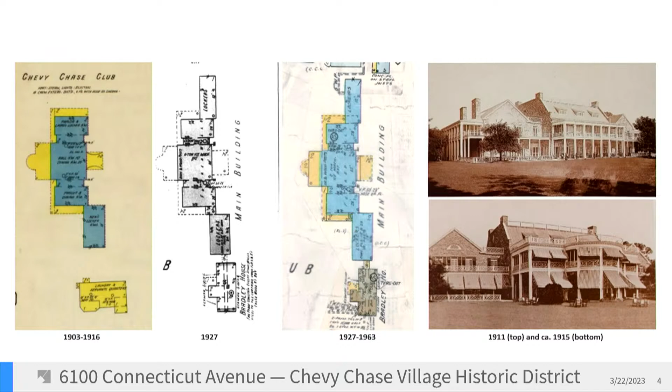The project team included this very helpful graphic that shows the different phases of development. You have the enclosure of that porch in the rear in 1939 and replacement of some of the windows in 1969 and 2002. You have this 1958 addition that doesn't pop up on the Sanborn map for some reason, but it's in the Chevy Chase Club's records.

And also, probably most prominently, you have the demolition of what was that Northern Woman's Locker here in 1969 for this large addition.

The proposal includes fenestration alterations, alterations to an existing terrace and patio, construction of a new terrace and deck, hardscape and pathway alterations, installation of cable railings, rooftop mechanical equipment, removal of 2 trees, and lighting alterations and replacements.

I'm going to walk through the various stages, starting with the fenestration alterations. Overall, staff finds that all the proposed elements are compatible with the massing, scale, design, and materials of the historic resource and district, and should be approved as a matter of course.

Starting on the southern end of the building, due to the location on the rear of the building or areas not visible from Connecticut Avenue, we have this corridor and the replacement of a window with a door. Just to orient you, here is the corridor that connects the men's locker room, which was part of that original 1911 building, to the Bradley House, a 1926 addition. The historic district boundary actually cuts right through the center of that corridor.

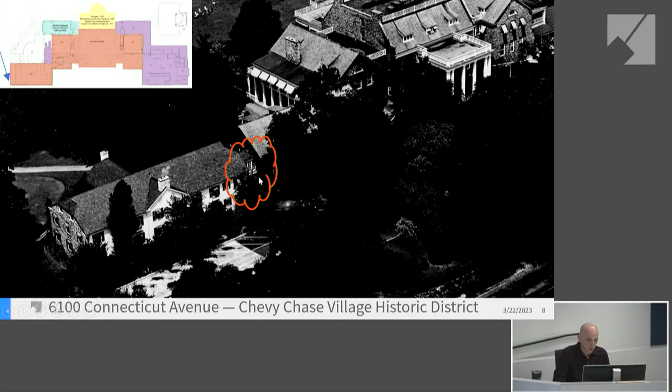Here it is in the present day, looking at it from the rear of the property. You can see the replacement of this window. They're going to cut the stone walls down to install a 6-panel wood door with a 6-light transom above it. This door also matches a door on the opposite side of the corridor that accesses the Bradley House.

Staff finds this to be compatible with the design, and again, it should be reviewed with very lenient scrutiny as it's on a non-visible location of the clubhouse.

Moving further along, this is the south elevation of the 1969 vestibule. The proposal is to replace these 2 non-historic 12-light wood windows with a double-leaf 10-light wood door. The design actually better recalls some of the fenestration patterns formerly seen at this building in historic photographs.

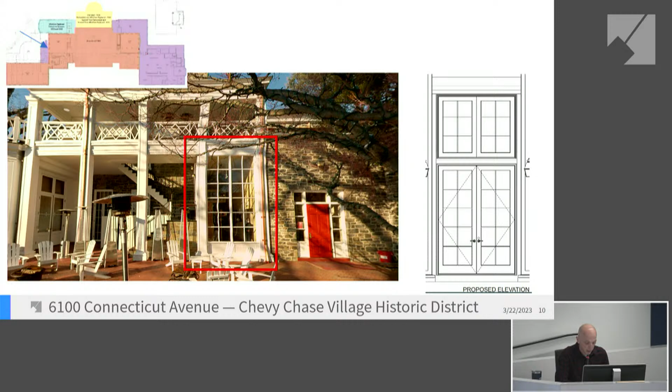Next, we have the replacement of these 2 double-leaf wood doors with a single-leaf door and a 3-light transom. This is on the south elevation in the original south gable wing that accesses the tap and card rooms.

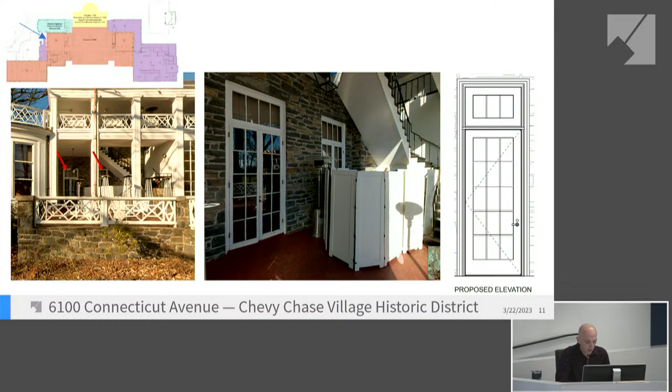On the west and southern elevations of the 1958 addition, the proposal calls for the replacement of the fixed 2-light windows in kind, and the replacement of the triple hung windows shown with the arrows on the screen with 2-light fixed windows that will match the design of the existing window.

Here are those same triple hung windows from that 1958 addition shown on the other western side of that elevation. There's 4 of them on this side. I think the applicant team may talk about, on site, how this bar is actually going to be slightly lowered, I believe, but it wasn't evident from the application, and they may have more comments on that when they speak.

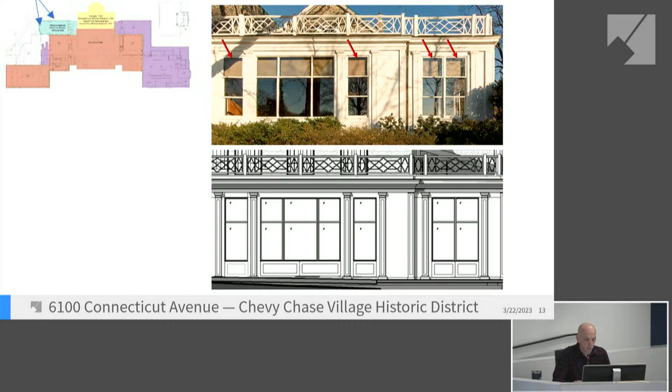Here we have the nearly in-kind replacement of a pair of double-leaf doors on that 1958 addition. The door on the right would now be permanently fixed, but would be a false door to recall what is presently there.

Here on the north elevation of the 1969 terrace room, we have the restoration of an opening to its original appearance. The doors would be removed and replaced with fixed light windows that match the existing 2.

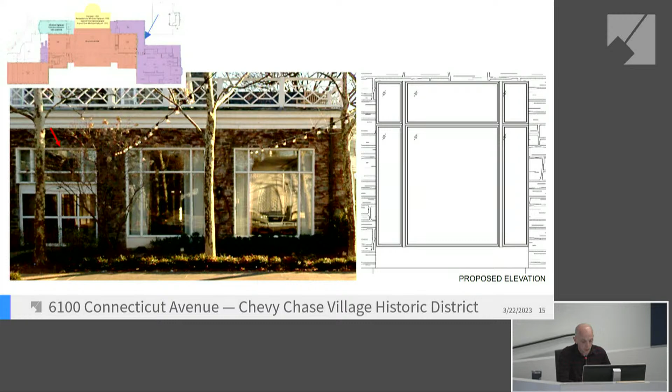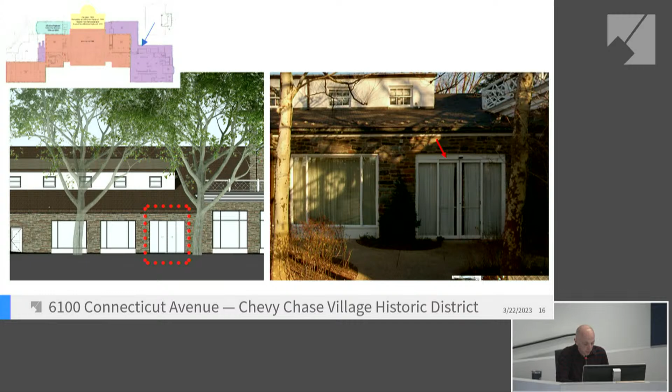Here, this is the 1969 pool and canteen wing. The submission didn't include any detailed sheets on this proposal, but it does note the in-kind replacement of the automatic doors.

Here for the last fenestration change, this is the north elevation of the 1969 pool and canteen wing: the replacement of the fixed light windows and double leaf door in the canted bay. Something I missed on the staff report is that these windows on the side are actually doors, and they would be replaced with 4 light windows.

Again, this is on a non-historic section of the building, and also not visible from the public right-of-way, and should be approved as a matter of course, similar to the other fenestration alterations.

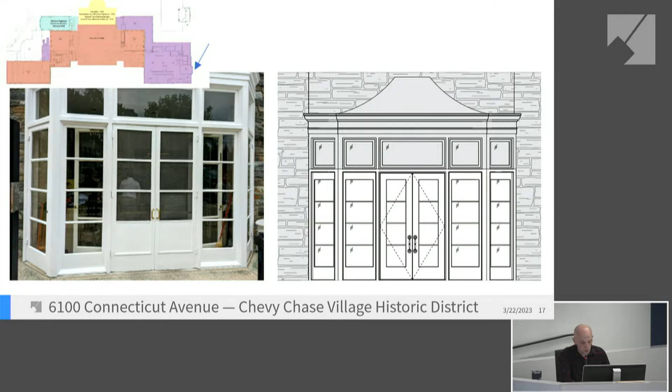Moving forward to the roof alterations, for the northern and southern terraces on the rear elevation, where the blue arrows point, they have planned to re-roof and install wood decking, which would not be evident from the public right-of-way or really from any part of the property.

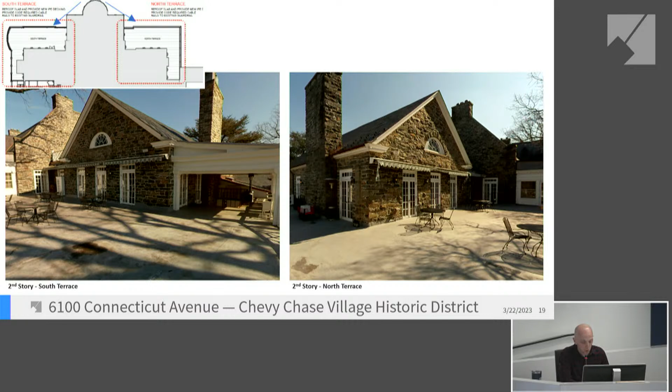As part of this project, they're proposing to install cable railing behind the existing wood Chippendale railings as required by code. As you can see in the example photographs, this is really a transparent solution in lieu of alterations to these character-defining railings, and staff is supportive of this alteration to this part of the building.

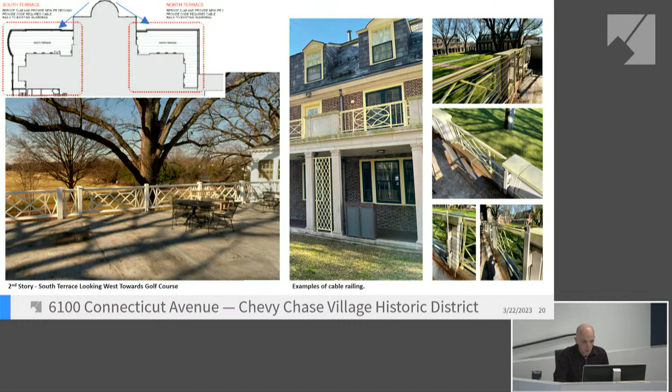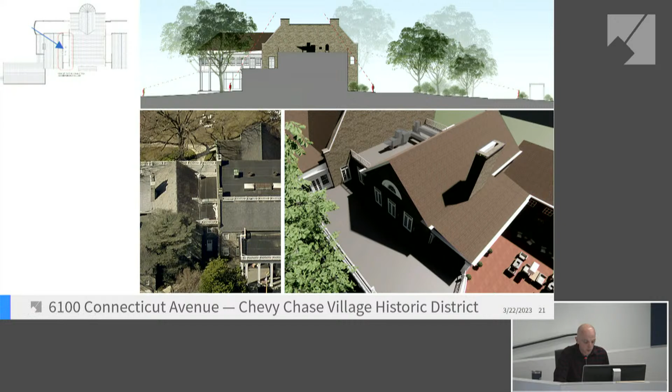Moving forward to probably the most significant part of the project: the terrace, deck, and landscape alterations. This is the existing condition now. As a refresher, the historic district boundary ends at the corridor connecting the Dudley house to the men's locker room. There's an existing brick patio here installed in 1969. There was probably a patio there prior to that, but construction photographs show it was all torn up at that period. And you have this 1958 wing here.

Also of note are the 2 tree removals you can see on this plan: a 12-inch black gum and a 10-inch sweet gum tree.

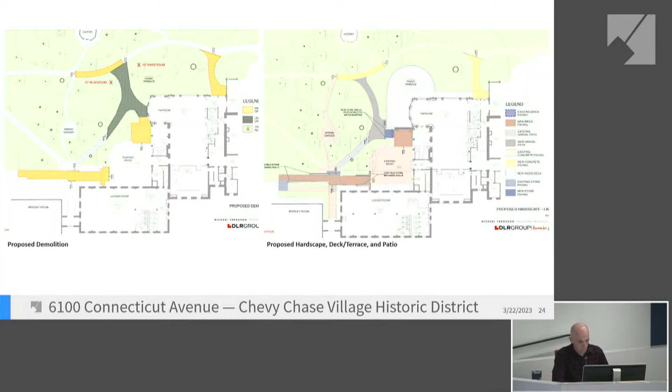As part of this, moving forward, the applicant should address how they'll construct the deck in consideration of any nearby significant trees in relation to the footings and other construction methods they may address in their presentation tonight.

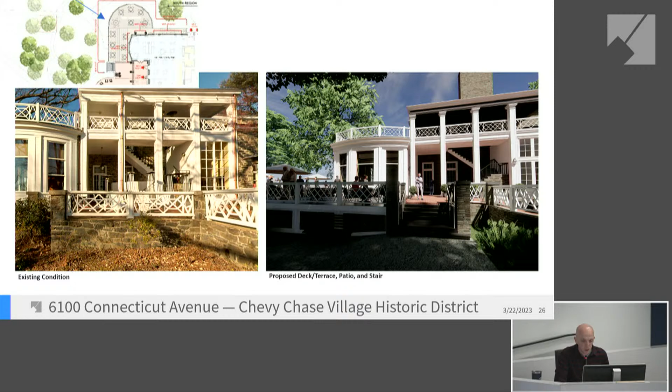Here you'll also have partial demolition of one of the stone walls and part of that patio for the addition of this stair. So this is the new brick paving in this square section before the bend, and here's the new staircase. Staff noted in the report that additional details should be included about this stair in the HOP application.

The new brick pathway runs parallel to the men's locker room, here for ADA accessibility. It removes this two-stone stair riser and replaces it with just a singular slope. And you have these two stone walls that taper down as you approach the building, being added as well.

For the lighting package, staff didn't include every single light proposed throughout in this presentation, but basically you have replacement of the existing lighting with very similar lighting throughout the rear elevation. Most of it is copper, and most of it is appropriate in terms of design and materials to the historic setting of the building. It should be approved as a matter of course since it's on the rear elevation.

Overall, staff finds that the alterations are compatible with the massing, scale, design, and fenestration patterns of the historic resource, and should be approved as a matter of course since they're located on the rear elevation of the building or not visible from the public right-of-way. In terms of HPC feedback, staff is seeking overall comments about the compatibility of the massing and scale of the new terrace and deck with the clubhouse, the appropriateness of the cable railing installed behind the existing railings to satisfy code requirements, the removal of the triple hung windows of the 1958 addition, and the replacement of the window on the south elevation of the men's locker room with a door, within that hyphen where we started the fenestration changes. I'd be happy to answer any questions.

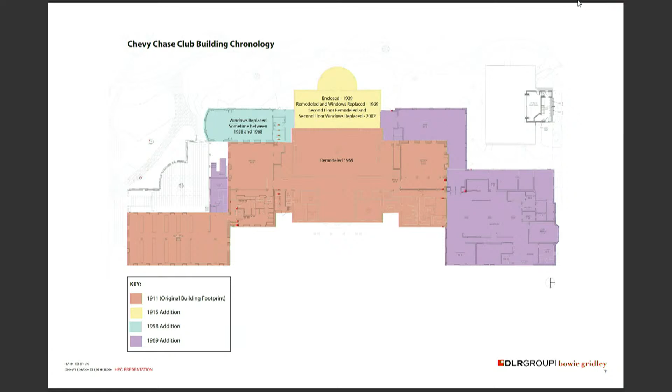As staff summarized, the Chevy Chase Club has undergone a number of alterations during its history since its original construction in 1911, in order to accommodate club growth and also to meet the changing needs of club members. Staff has gone through in great detail so I won't repeat, especially given our limited time, but we will go through some historic photos just to illustrate some of the changes.

So here's the club in 1913, shortly after its construction. Here in 1919, showing the expanded two-story porch and the rounded bay. Here it is in 1957, just before the completion of the men's card room, which you can see on the right-hand side of your screen, and you can see the original window configuration here.

And the top left photograph from 1968 shows that at some point between the completion of the card room and 1968, the windows were replaced to their current configuration. These two other photographs show the construction of the new north wing, as well as that egress stair to the south. And then here are some current photographs. Here again, and I will hand it off to Tom.

Thank you, Alyssa. So my intent here was to walk you through the scope of the planned work. John really did an excellent job of summing that up, so I will not dwell on it too long. I will just try to expand a little where you showed some interest and had questions, but please feel free to ask if you'd like me to go deeper into detail on anything.

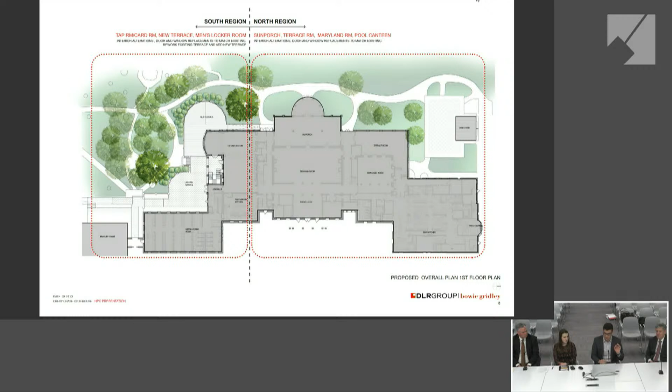So we show the club here broken up into a south and a north region. North, we're doing very limited work, mostly interior. South is where the majority of the exterior work is concentrated, and interior as well.

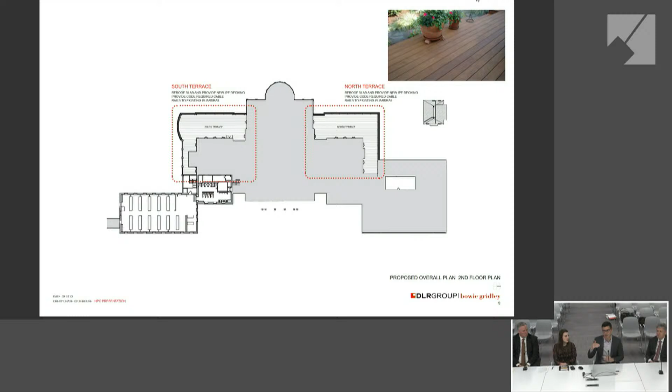Upstairs, John pointed out the changes we were planning to make to the south and north terrace, specifically re-roofing to replace some issues with the waterproofing there. We are going to keep the existing Chippendale rails as is, but we are applying this cable rail at four-inch centers to meet current building code.

This is the mechanical equipment that Ms. Burt asked about. It is a new makeup air unit for the new kitchen and an exhaust fan. This is the only portion of our work that could be considered visible from the public way.

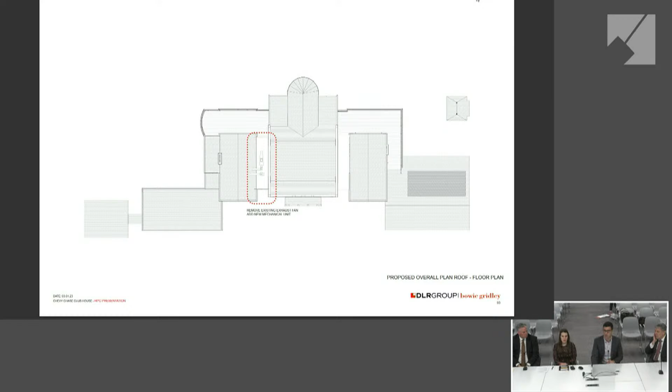This is a quick summary of the exterior work that we're planning on. John, again, walked through all of these replacement doors and windows around the existing building.

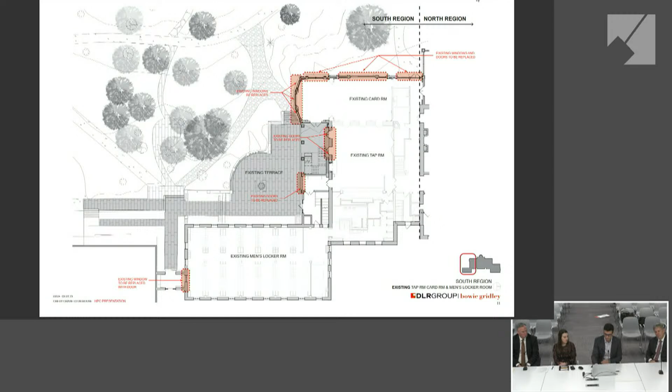This is a look at the demo. One correction: the previous version of this presentation showed us removing a tree to the left of that gray area of path that we're removing. We're actually going to do everything we can to keep that tree in place, so we shifted the new path so that it avoids it.

So we're just removing that 10-inch sweet gum that's noted and the 10-inch maple on the existing patio. One other note is that the layout of the new terrace is specifically done to avoid as much damage to the existing trees as possible, specifically this extremely large oak that is tucked right behind the building, which is notable in pretty much every view from the west side.

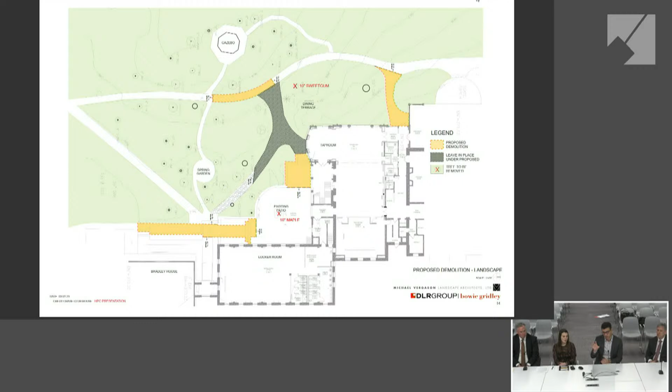These are showing the existing paths that we were removing. Again, that's to the stair and existing patio up to the upper right-hand side of the screen. That's being removed to allow us to expand the terrace. We're replacing the path that leads up to the existing patio to allow for ADA access to the outdoor space.

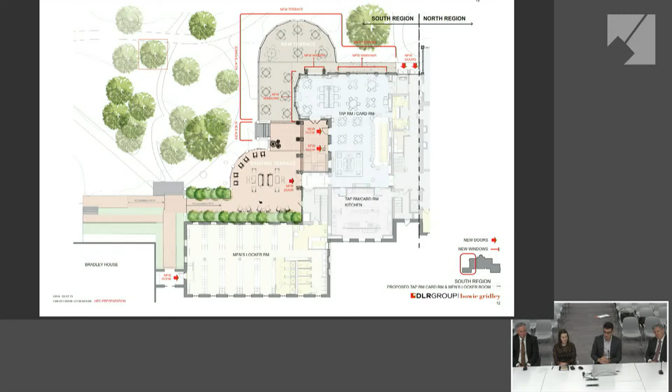And then here's a quick view of the new plan, again showing all of the new doors and windows we're planning, the new terrace, the new stair, and then the new egress door that is in that hyphen that was mentioned in the locker room. So that one's being provided to meet building code.

And these are a quick summary of the change on the north side. Again, very limited. It's mostly replacing doors and windows in kind and adding a new window where there was once a less than useful sliding door.

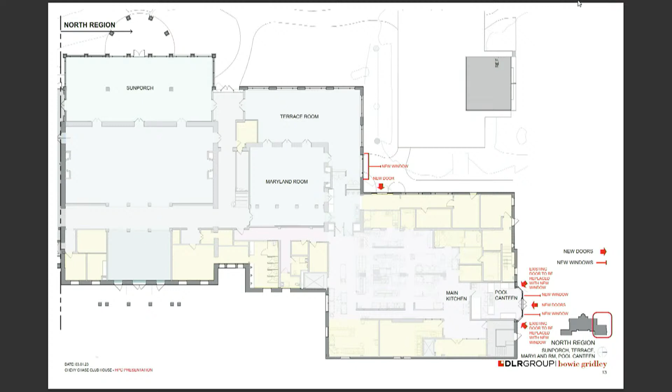Again, here's the new plan. Here's the new pathway that we were talking about.

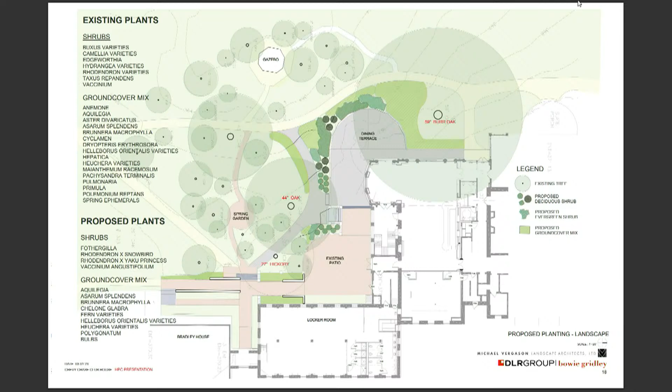Here's a quick summary of the existing plants. The plants that are being removed or relocated, everything that we're replacing them with are in keeping with what is currently there. So nothing too out of line there.

I'm not going to really dwell on any of these. These are really just showing all the changes that John summarized - the new doors and windows and a look at the details. We've been working with Marvin Windows for some time now, trying to get the detailing as close or at least in keeping with what is existing.

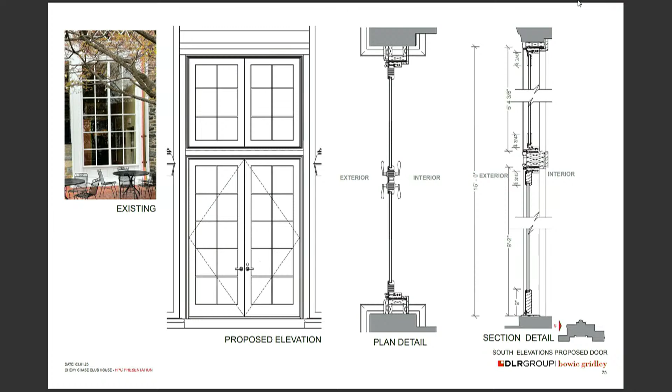The new door is going to take the place of the double doors underneath the overhang. Here's that new door for egress from the men's locker room that we mentioned in that hyphen. You can see another view of it here. We're showing the existing door across the way. We mentioned that the new one is trying to match that.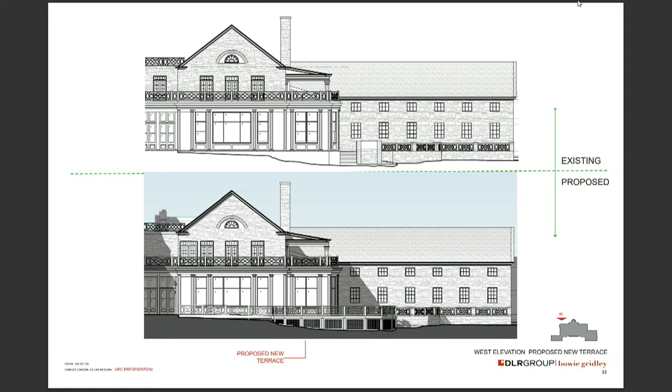There was a question on the terrace. We are doing it on this diamond pier system. These are specifically chosen piers that come in with a pronged approach meant to avoid tree roots to the extent possible. So again, we were trying for as light a touch in the installation as possible, as opposed to doing more traditional helical piers, which will take out anything in their path.

Again, we're doing the Chippendale rail to match the existing. We're providing a 4-inch cable rail behind it, which we feel is as invisible as possible while still meeting building code.

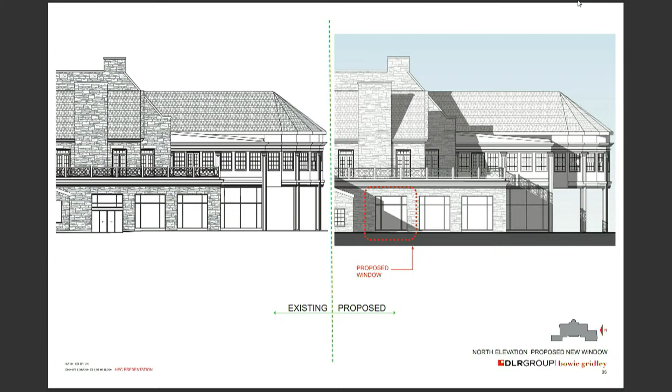Proposed window that we discussed. The proposed work on the north side at this bar area. Again, we are really just replacing things in kind.

And there's a series of renderings here. We don't have to go through all of them. I think you probably get the idea at this point, but I'm happy to address any questions you may have, or I'm happy to cycle through these if you like.

Thank you very much, you covered a lot in a very short time. Thank you. Any questions?

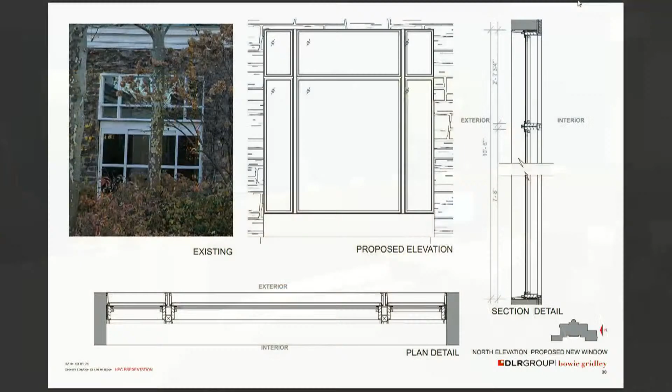Commissioner Pelletier: Thank you. You just showed, can you go back a few, you were showing back, that one. Oh, forward. Are you adding those windows up above? Oh no, we're not. So those are existing? If those are actually meant to be there, yes, they would be existing. We are not providing anymore. Okay, so they're just existing. That seems to be a hiccup in our system. Sorry about that. Okay, that was one question. Good catch.

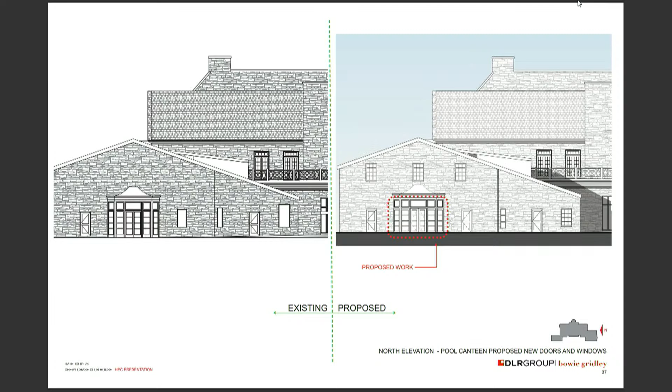And there are some other inconsistencies on there. There's 2 doors on either side on the new, and there's a window and a door on the existing. But the only thing that you're working on is that piece in the middle? You were absolutely right, I cannot explain those inconsistencies. Okay, that's fine. But nothing outside of that little red bubble is proposed.

And my other question is, have you looked at any possible ways of screening that equipment? Because right now I notice in your diagram you're showing the sight lines to the top of the railing, but it's a transparent railing, right? It's just the same railing that you have everywhere else. So really the sight line is from the top of the roof, not 3 feet up. That's fair, yeah, the railing obscures it a bit, but you are correct. And I guess my question is, did you look at anything, like leaving the railing but maybe making it more opaque or something from Connecticut Avenue? I mean, I agree with you that, I didn't even know this building was here, that's how many trees there are.

I'd be concerned that you could see something from Connecticut Avenue just driving by, and it's such a beautiful building, like to have that usual equipment on the roof gives me a little bit of heartburn. If there was some nondescript way of screening that, like putting something opaque behind the railing, I don't know how that would look, but I'm curious if that is anything that you looked into yet.

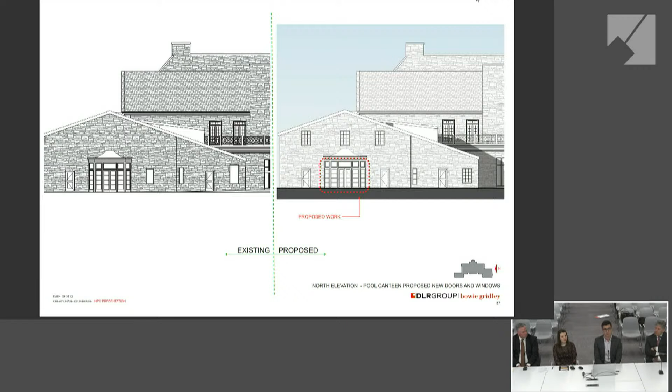Is it the mirror image on the other side of the big entry, with one of those hyphens on both sides, and they have the Chippendale railing up at the top? That's both correct. If you made one opaque and the other non-opaque, it would look weird.

So here's a view from the west side, looking back on it. You can see the existing railing in the upper left-hand corner of the image, and then you can see it with the new mechanical unit there. So it's the same railing condition on either side. That's from the back.

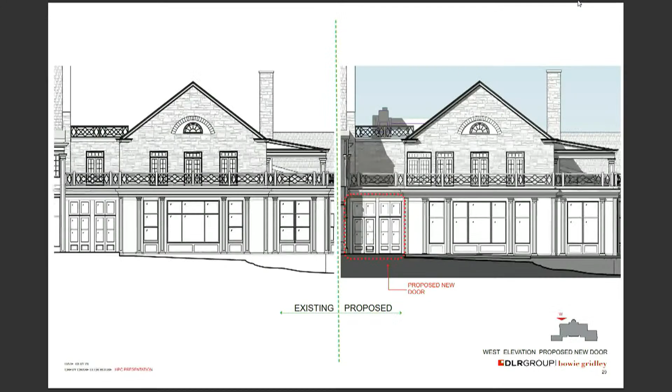I was more concerned about from the front, from Connecticut Avenue. I'm just curious if you have a symmetrical, I assume it's symmetrical on both sides of the big entry.

Yeah, I'm looking back at that head-on. I don't know if we call it a portico or not. We don't, I guess you can kind of see that. We are not adding the railing, the railing is existing. But you don't have that same condition on the other side of the big entry. It's kind of hard to call it a portico, but it's not a portico. It's not a perfectly mirrored building. It's similar on both sides, but probably not the exact same condition. Okay, all right, thanks.

Commissioner Burdett: To keep beating the issue a little longer, the tree in front of the equipment on Connecticut Avenue, that's a deciduous tree, but is it full enough with the branching that in the winter it obscures the equipment as well?

That's a good question. I guess I've not done a study of it in the winter. I might ask our guest to give any of their observations.

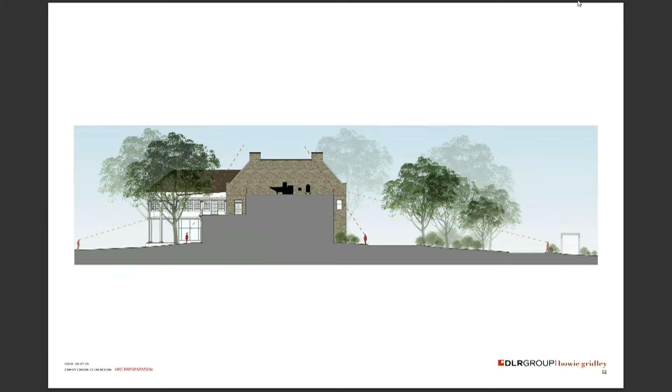Thank you. The trees you see would be in a planting bed in the foreground. There would be an additional planting bed with trees of significant height on Connecticut Avenue. So from an automobile or even from a position on the opposite sidewalk, you'd be looking through a wall of trees to another planting bed and then up past the rail to the equipment, depending on your angle. There are a number of evergreens within that planting bed. I can't speak if the particular tree we see in the image is one of them, but there are magnolias and others in that same planting bed.

It should be pretty hard to spot it without standing there looking for it. So, thank you.

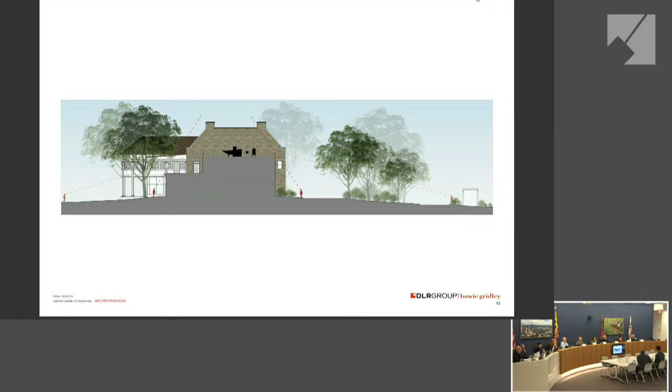Commissioner Haynes? I just have two comments. Is the existing railing height, does that meet code? On the balconies? Yes, it does.

So we shifted the order a little bit and the page numbers did not catch up.

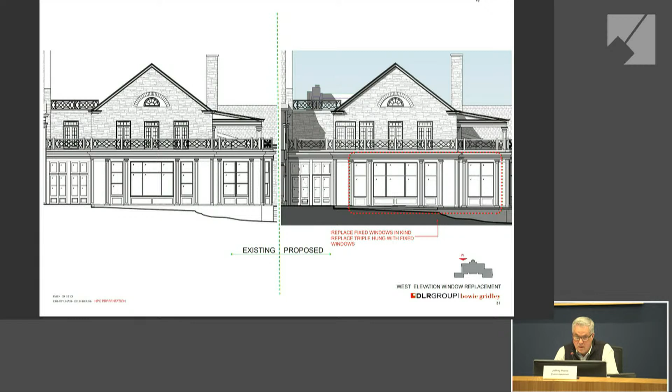On the proposed elevation, second floor, I assume that double door to the left of the upper pavilion is not proposed? Again, no, we are not touching anything up there. I apologize for the lag between the existing model and the proposed, there appears to be some layer issue, but no, we are not touching those. We're not touching any of the doors or windows up on the second level. Very good, thank you.

Any other questions? Commissioner Galloway? Thank you, Commissioner Galloway. Just a couple questions here. Back to the equipment again, was there any equipment on that roof? Is there any currently on the roof?

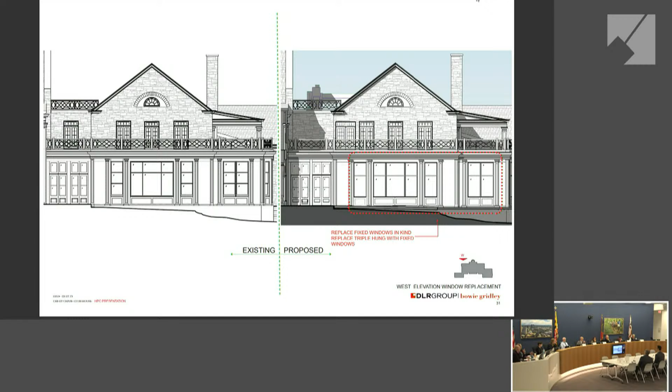There is currently some equipment up there as well as an exhaust fan. I believe the satellite image that staff member John showed a little bit of it. It was hard. Yeah, I pulled that up on my screen if you want to switch over.

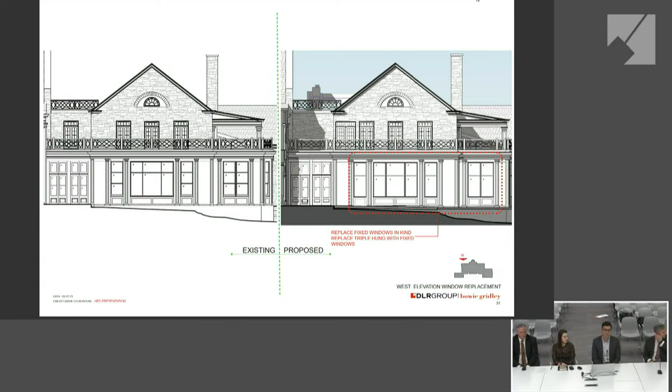And just to follow up on some of these questions, when we were out there earlier, what was that, in January, I tried to look for any mechanical equipment, and there is some mechanical equipment I saw on this satellite view, but from the street, you really couldn't see anything existing up on the roof because of all the trees and the railing and just this location. The location seems, this seems a little bit taller, the equipment being proposed, but it's still about, and maybe a little bit more towards the front, but it was hard to see anything in those spots. And that was in January.

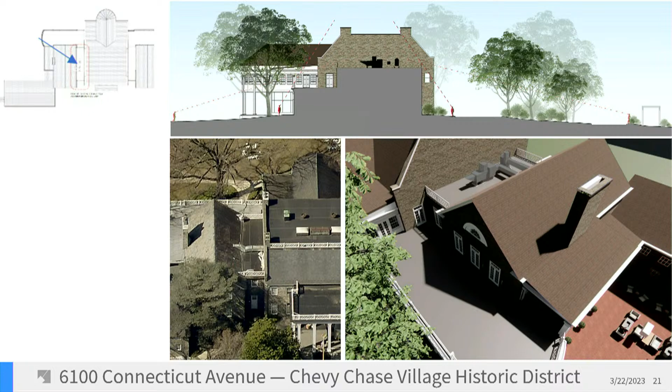All right, thanks. And as a follow-up then, in terms of your sight lines, the equipment that you're showing in the model or in the sections, is that consistent with something that's been selected at this point, or is that an anticipated general height?

And where I'm going with that is I want you to be careful that if you end up with a piece of equipment that's twice as high, that doesn't reflect the same sightline issue that you have now.

Yeah, it's a very good question. The models came from the manufacturer, from the selected equipment supplier, so it should be accurate. There's always a little bit of variance, but I'm talking an inch or two—it's just not 10 feet.

All right. Just out of curiosity, the one door that you're replacing, the double door you're replacing with a single, is there a programmatic reason, or was there any consideration to just keep the double door the way it was?

There was consideration. Some of the existing doors out to the terrace from the tap and card room have a step. This is one opportunity where you can get a slope and have it be a reasonable ADA access. The two doors are, I think, a little bit trickier to get through if you're navigating with limited mobility. A single door is a little more functional—easier for the wait staff to work their way in and out. We just found it to be a more functional solution, and a single door, properly detailed, we think is still in keeping with the architectural style of the rest of the building.

Okay, thank you. And then last but not least, it wasn't a herringbone pattern, but on the new brick on the walkway, the new ADA walkway, it looked like—I don't know what the pattern exactly was—but is that pattern indicative of the other brick walkways around the site, or just something new? It's meant to match the existing brick pattern. So we are removing the existing brick and replacing it with similar brick in a similar layout. Okay, thank you, that's all.

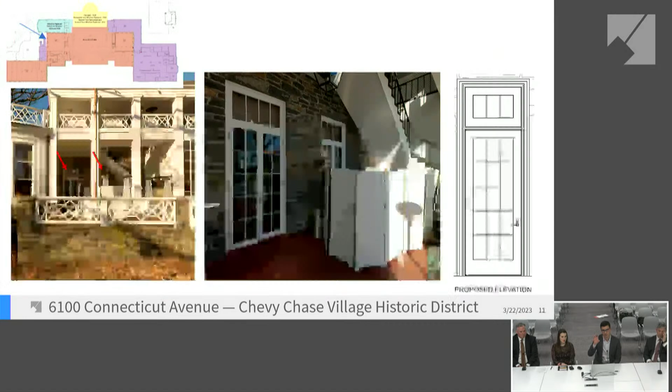Commissioner Pelletier has another question. Are you changing any of the masonry openings with this door replacement, like going from the doubles to the singles? We are not changing any of the masonry openings, with the exception of the new egress door that we're adding to the locker room. It's currently a window—we are keeping the window opening the same size, keeping the header in the same location, but we need to take out the bottom of the window. Right, but the width isn't changing? No change to width. Thank you.

More questions? We will begin our deliberation, and let me just tell you, this is something we do that I would like to say is unique, but it probably isn't. We have preliminary consultation—we have tremendous expertise on this commission. We will give you what we think this project will need to make it a successful historic area work permit. You're not required to take our suggestions, usually it's not a bad idea to at least pay attention to them. So we will give you our take on this project and look forward to seeing a historic area work permit hopefully fairly soon. Does anyone like to start off here?

Commissioner Doman: I just want to say you have an overwhelming amount of information that's been presented. Looks like to me it's been well thought out, looks like you spent a lot of time on this project. I think you've answered our questions appropriately. I'm just pleased with the amount of detail and thought that's gone into this project that's come before us, and wish you good luck. Thank you.

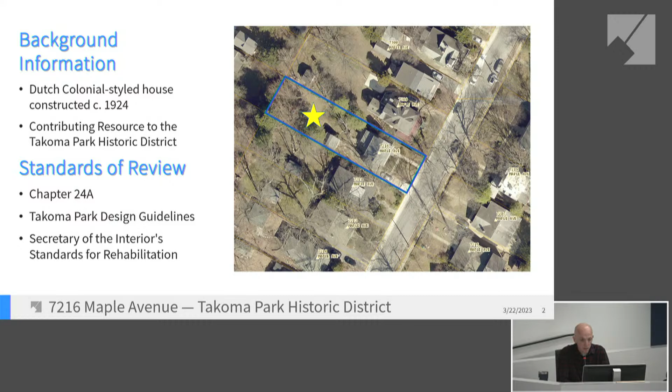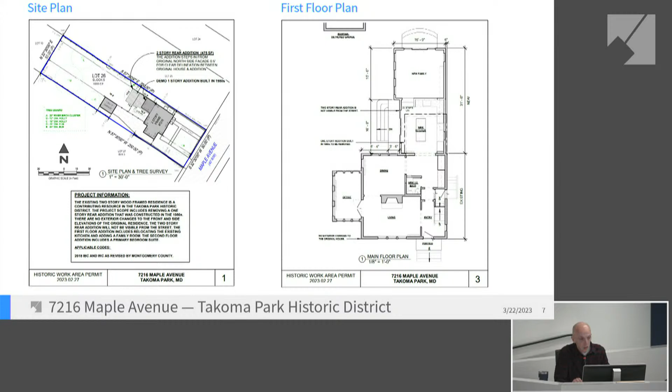Here is a site plan and first floor plan to show the overall scope and scale of the project. The depth of the existing house is about 25 feet 9 inches, and the proposed addition is 31 feet 6 inches. The addition consists of a hyphen that connects the historic house to a new side gambrel section with shed dormers. The addition's ridge is 5 feet 3 inches below the ridge of the existing house. The hyphen features cementitious fiberboard siding and board and batten, and the side gambrel addition features smooth cementitious fiberboard siding with board and batten on the hyphen.

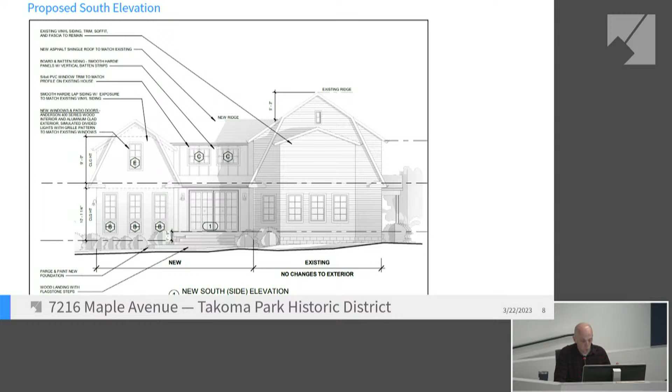Here is the south elevation. It's set back about 14 feet from the face of the historic house. Fenestration consists of sliding glass doors and 4x4 double-hung aluminum-clad wood windows set over 4-light fixed windows, with flagstone steps accessing a wood landing. Of note, some of these windows on the drawings are actually not 4x4 on the existing house—these on the side are actually 6x6, but the 4x4 window is still seen on that wing on the street-facing side and on the rear, so the 4x4 windows they're proposing still relate to the historic house.

On the back of the addition, you have sliding glass doors and casement windows in the shed dormer.

And here on the new north elevation, which will be visible from the public right-of-way partially, the continuation of the discussed materials, frame and fenestration, again, the board and batten hyphen.

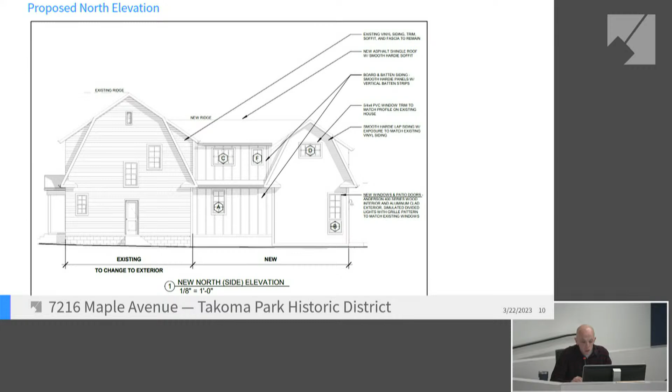So overall, with respect to the preservation approach, the architect selected a literal replication of the historic house, the respective form, that is connected by a hyphen. This prioritizes compatibility over differentiation.

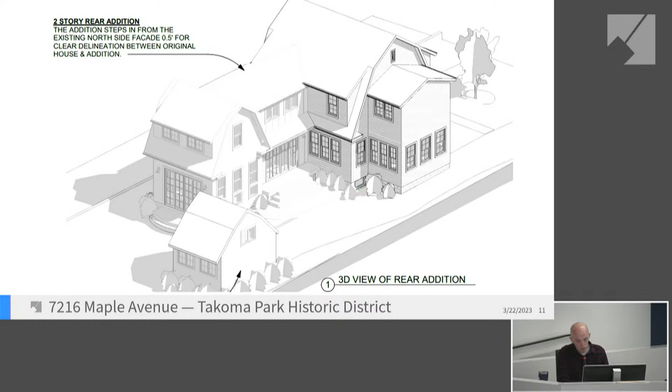So you have this smaller scale side gambrel addition with shed dormers that connects to a larger side gambrel historic house with shed dormers. The approach is compatible due to the use of the hyphen and the different scales. When you choose literal replication, this often requires the addition to be smaller compared to the historic house, which was accomplished by the lower ridgeline and overall massing, so the addition does not overwhelm the historic house or the district.

One of staff's concerns is the north elevation. The HPC generally requires additions to be inset at least 1 foot. Here, compared to the 6 inches shown in the proposal, an additional setback would provide greater relief and limit visibility from the public rights-of-way. There also needs to be additional detail potentially about the connection between that shed dormer and the new addition, particularly how it interacts if you push it back further. There could be some type of awkward transition potentially that should be explored.

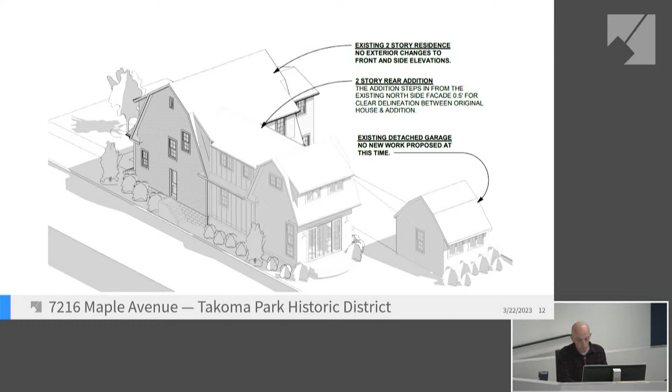Here is a rendering they provided that shows what an individual would see from the street. It's clear you can see some of the hyphen, but there's really limited visibility of most of the addition. I think if you set that addition back a little bit farther, it would even limit visibility more.

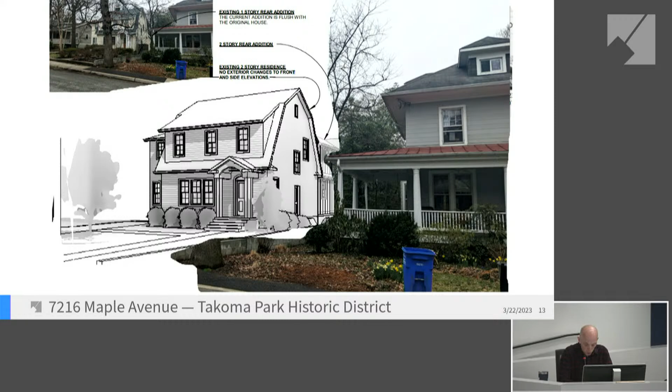So staff findings overall: the demolition of the non-historic rear addition is consistent with the applicable guidelines. The concept, scale, and massing is consistent with the applicable guidelines as well. Again, the literal replication of the historic house connected by a hyphen prioritizes compatibility, and the project is successful due to the smaller scale or ridgeline and the use of the hyphen. The addition will not overwhelm the character of the house or district, and we recommend that the inset on the north elevation be increased to at least 1 foot.

The design of the addition is compatible with the house. The proposed windows recall the design and fenestration patterns, and the sliding glass doors and flagstone steps wouldn't even be visible from the public right-of-way.

The materials are compatible with the historic house and surrounding district. The HPC regularly approves aluminum-clad wood windows and doors, cementitious fiberboard siding, and cellular PVC trim on additions. The board and batten siding differentiates the hyphen from the historic house and serves as a transition to the side gambrel addition. One part we brought up in the staff report is that the exposure of the cementitious fiberboard siding on the side gambrel addition doesn't need to match the existing vinyl siding, which is a non-historic material. This is a point of discussion that perhaps the HPC would like to touch upon.

And lastly, the staff report discusses that there should be a tree impact assessment done and a protection plan when filing for a historic area work permit. The root zone for tree B will be within the limit of disturbance as shown on their site plan.

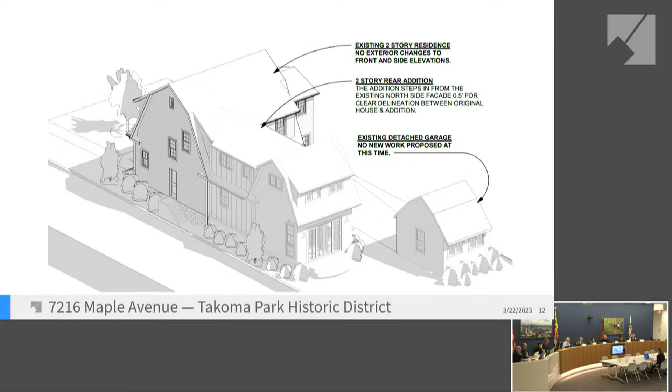Commissioner Doman? Yes, Commissioner Doman. I just support what Commissioner Haynes has said. I think you hit all the necessary things about the size and the massing, the lower ridge line of the new addition, the repetition of the gambrel roofs. I like that. The comment that was made by staff about possibly moving that hyphen in a foot, I think is appropriate. I think that should be easily handled.

I think it actually would work better if you move it in a little bit. I think that would be great. I support this. I think you've done a lot of good homework on this.

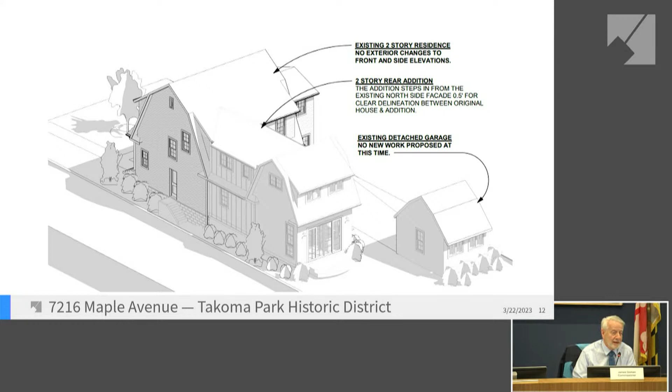And I'm curious, the homeowners moved in already? We just moved in on Monday. And you're ready to undertake a major remodeling in a new house, right? Yes. So you're going to put up with a lot of dust and disruption, and you won't have a kitchen for quite a while, it looks like. We're hoping to get the timing just right, and of course, that won't work out. But I just wanted to prioritize trying to sell our previous house at a time in the spring market. And so we moved in, and we'll hopefully be able to keep a lot in boxes and make it work. Well, good luck to you. Thank you.

Any other questions? Commissioner Pelletier? What is the distance, maybe it's on here, the distance between the corner of the garage and the corner of the new family room?

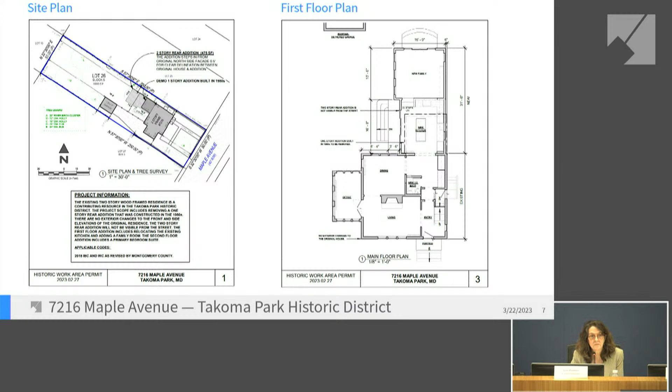I'm sorry, 10 feet? It's about 10 feet. Okay, it doesn't work as a garage as such because the driveway is very narrow, passing by the sunroom.

So what we hope to create is a sort of courtyard social space where right now there's a chain link fence that kind of cuts in half that area. And if we take out that chain link fence and have those stairs coming down from the sliding doors, it'd be sort of a natural place to have outdoor gatherings. It's really a garage, but you couldn't get a car in there, and we don't intend to use it that way. So maybe having it open, having the kids hang out in there with their friends while the grown-ups are in the main house.

Yeah, you could put a smart car through there. A smart car or a Vespa. Okay, that's fine. I appreciate everything, like all the 3D stuff that's in here is really helpful. So I was just more curious about that because it's a bit close, but it's not an issue. It's just a question. Thank you.

Any other questions?

If not, I think I'll start this one off. When I saw the picture of this, I almost cried because I had a house in Oregon, in Salem, Oregon.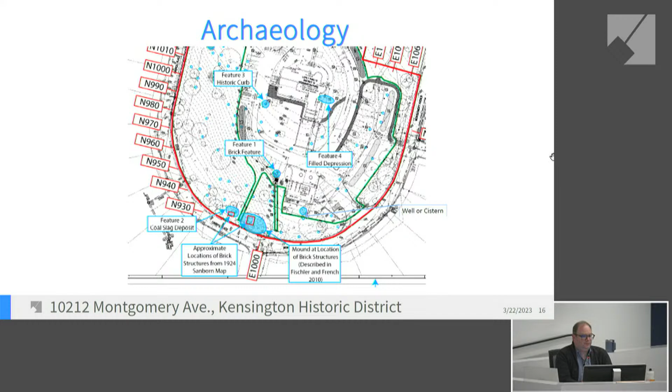So the applicant proposes to construct 17 market-rate condominium units within the mansion, carriage house, and proposed building addition. Again, the focus of this preliminary consultation is the overall size, scale, and massing of the addition and proposed site work, so we can address specific material preservation and design details in a separate preliminary consultation.

Then to connect the historic building to the addition, the applicant proposes to construct a glass hyphen. It is a much smaller expression on the western elevation. On the eastern elevation, they're getting a hallway on the first and second floor, so more of that will be expressed. And they're also using the hyphen for circulation inside the building, which is also shown in the floor plans.

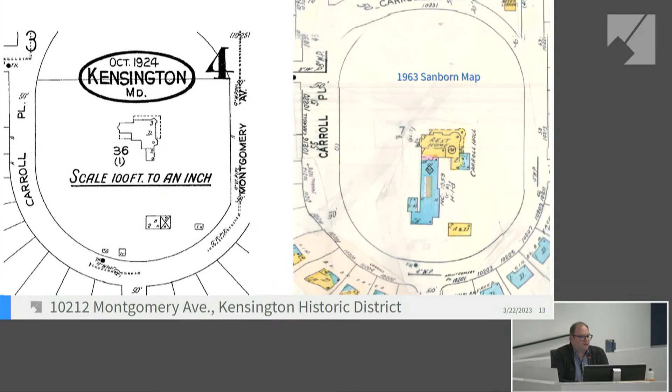Regardless, we're proceeding as though that easement doesn't exist because it is in the process of being extinguished. And if it's not there, then we don't have to worry about those interior constraints in this project. I would point out that the front historic entrance is specifically identified in the floor plans. Let me get to the first floor plan. As the lobby/museum, so the original staircase is being preserved. You can see that some of the historic fireplaces are being preserved both in public spaces and in units. So there certainly is interior preservation occurring. It's just not being reviewed and approved by the Maryland Historical Trust Easement Committee before coming to the HPC. Obviously, if the easement isn't relinquished, there's no project on it that I can see.

Is there a requirement? This is going to be 17 condo units. Is there, and this is not necessarily historic preservation, but does the applicant have to have so many parking spots per apartment or per condo? Is it like two spots are required? Because the amount of space taken up by parking is going to be significant here, it seems to me. So parking minimums are established in the zoning ordinance, based on calculations that I'm sure the applicant could get into beyond simply units proposed. But that's where additional parking is partially driven by that requirement.

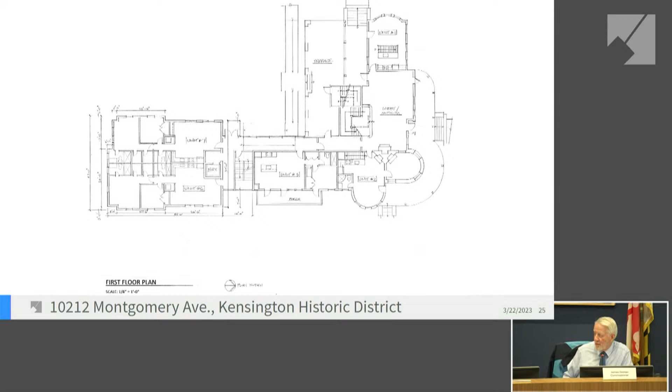Rebecca Ballo for the record. The property has been continuously maintained by the Montgomery County Parks Department and their staff, and it is in the middle of Kensington, the Friends of Warner Circle. There is great interest in monitoring and protecting this property in perpetuity, and to my knowledge there have not been any issues, but if you have any questions, you can direct that specifically to the applicant or to the park staff who are here tonight to answer those questions.

Commissioner Pelletier: just to clarify the easement thing, is the whole thing being expunged or just the interior? So the exterior, there's no... so the whole easement is, it's basically like the easement doesn't exist anymore. Does that create limitations for what restoration can happen? Or could they knock it down? Well, no, because all of the work requires approval.

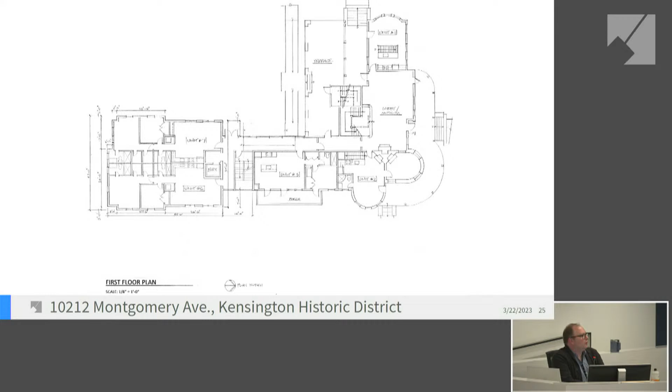The work, if the easement were to exist, all of the work would need to be reviewed and approved by the Maryland Historical Trust before they would even bring it to you. So that's why I point out that we're bringing this forward as though the easement has already been extinguished, because the HPC is the body that's responsible for reviewing it, and the Maryland Historical Trust has nothing to do with it at this point.

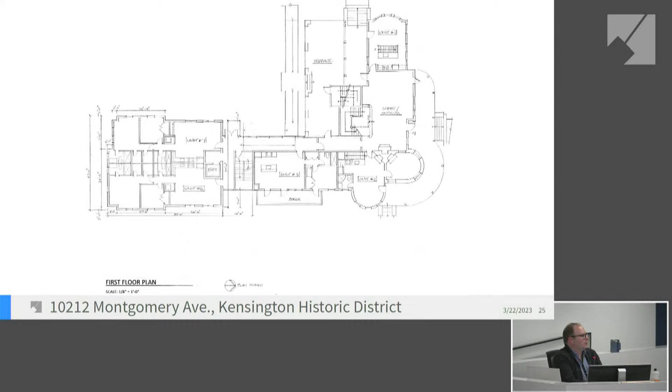Are the chances of it getting extinguished good? I would say they are. It is supported by our agency. We've had discussions with the Maryland Historical Trust about this, with our legislative team, supporting this bill that's moving through.

Just some very brief background: it has been standard practice for a lot of cases where there is a bond bill or other money that comes from the state for historic preservation, that an easement managed by the Maryland Historical Trust tends to be attached to those dollars. The state has been reviewing the efficacy of that policy, particularly where there are some redundancies in the system. This is a designated historic district with all alterations under review and the purview of the Historic Preservation Commission. Other easements managed by the state may not have that level of local regulation in place.

So for this project, all involved seem to think that the property would be well and adequately reviewed and cared for without the additional layer of the easement review, which is why we're moving forward. The timing is a little interesting with the development project moving forward, which if you have specific questions about, you can ask the applicant or the park staff. No, that's fine, you actually answered my question. We all support this. Okay, all right, cool, that's it.

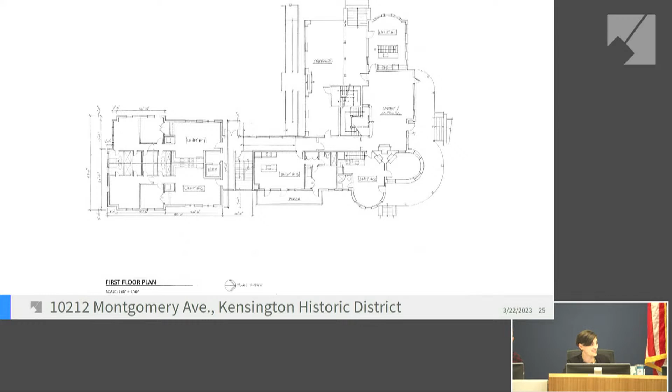Other questions for staff? Okay, if not, I would invite the owner and representative.

I have several names: Elizabeth Bear, Daniel Eichner, and Richard Vitulio. No, I'm sorry, we must not have put that correctly. Okay, well, that's what I have.

Why don't we ask the applicant to introduce himself? How about the representatives from Kensington and the Parks Department come forward, anybody who is with this project. If you could turn on your... I'm sorry, I'm just going by what I have here, and I apologize. No, sorry, that was our error. Carl Vogelmeyer, I'm the applicant and the person responsible for this application. Okay, terrific.

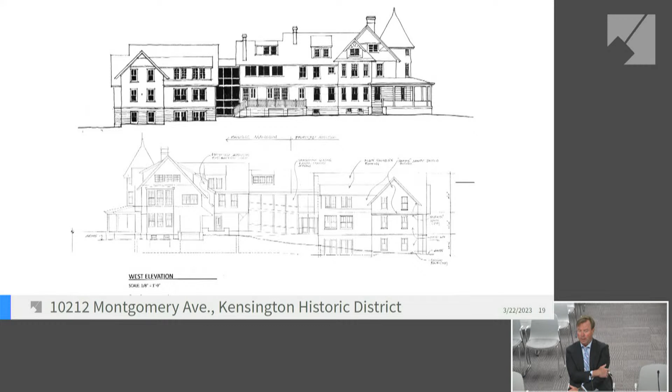Sure. It is obviously to connect the 2 buildings. We're still playing around with angles and a straight glass enclosure. We believe that if you're looking from the outside in the courtyard through the glass hyphen, you'll be able to see the historic structure through that. We also have inherited drawings from a previous concept plan, which was, back in the day, something for Parks to use as administrative offices. The hyphen is really more along the lines of coordinating what we saw previously and what was approved with what we're trying to do today.

The material would mainly be anodized aluminum in all probability with glass, as little wood on the outside as possible in the sense of maintenance. I think the profile is going to be pretty critical on that.

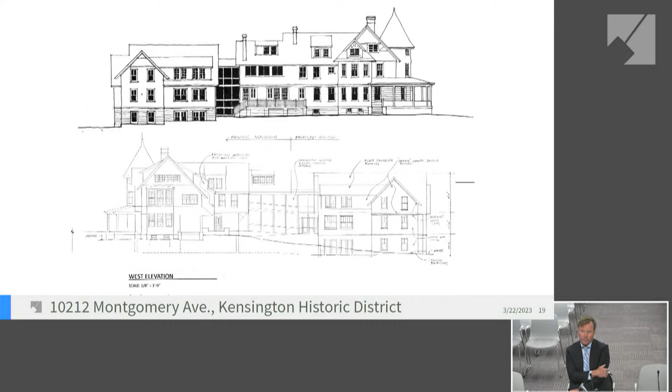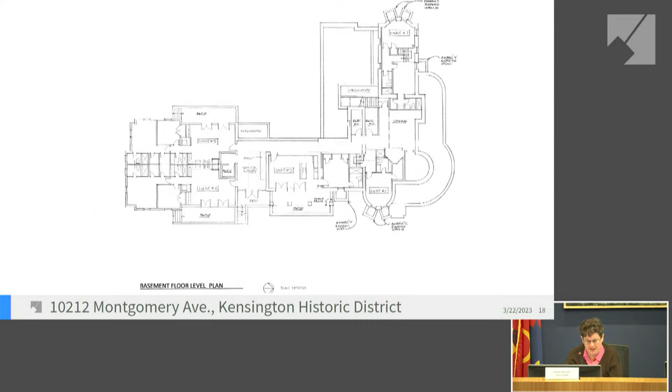One other thing I noticed, and this is on the interior, which really isn't us, but it might cause a problem: in 2 units you're showing spiral staircases going down. Those have been taken out. Good, because they're not allowed anymore. No, they were taken out. I'm not sure if they're shown on the basement floor, but we do have duplexes specifically utilizing the lower level of the units on the first floor of the main home. Okay, just so it's not the spiral things. Okay, thank you very much.

Any other questions? Yeah, I do. Commissioner Doman? Yes, Commissioner Doman. I have to hand it to you, this is one really big undertaking, this project here. It's huge. I did go out to see the house. I did walk around the house. I did walk the grounds and walk the property.

From what I could see by looking in the windows, there's a lot of deterioration on the inside. When you look in the main front door, the ceiling is falling down. It still has remnants of like an old hospital or something, used to be the admissions office or something. You're gonna change a lot of the floor plan. Have you looked at, I assume you must have, but the structures of this?

How is it framed? Is it balloon framing? Are you going to get into something that you can't see because you've got siding on the outside and plaster on the inside? Do you know what your walls look like? Yeah, that's a very good question. The answer is I don't have X-ray vision. But with that said, we do plan to identify and repair and repurpose every square inch of the building. I would imagine there's a lot of dry rot behind some of the plaster, of course.

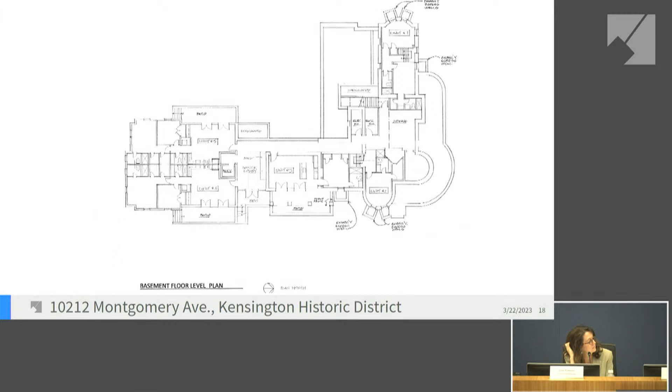Okay, that was it. Thank you, I get one more question. Commissioner Doman?

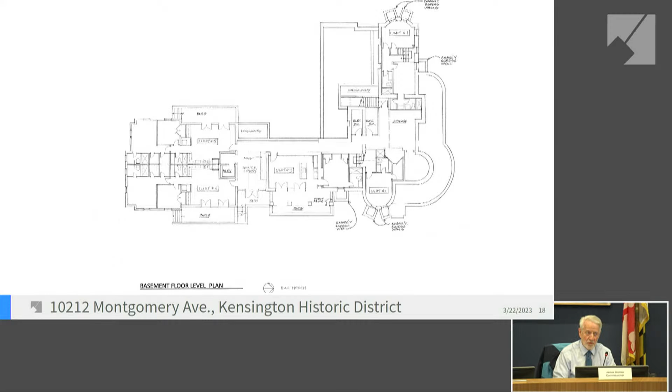This is a little bit off of HPC, but the proposal is for 17 market value condominiums here. Has anybody approached you about making affordable housing tagged into this also, maybe a couple units being affordable housing? That's my question. I'm not opposed to affordable housing - in my past I worked for Manna, Arch Housing, and when I worked for a large developer I brought that skill set to those projects.

I'm not sure - this is a very, very difficult project, and I hate to say sorry to people that aren't as well off as myself. We're looking for a percentage of internal rate of return that justifies this project with my bank, and it's getting harder and harder to justify projects like this with interest rates going north.

I was hoping rates would remain the same today, but the reality is it may not be until the end of September that we'd be getting a building permit, and we're not sure of that. The units aren't incredibly overpriced. I do think the community will be ecstatic, but I have a pricing list if you're interested in looking at that. The fact of the matter is...

They're units that are $400,000 to $700,000. It sounds like a lot of money, but to live in a mansion and have a park as your view - most of my clients are either empty nesters or just starting out, and it's a pretty neat mix, the old people meeting the new people in the community. So I wish I had a better answer for that.